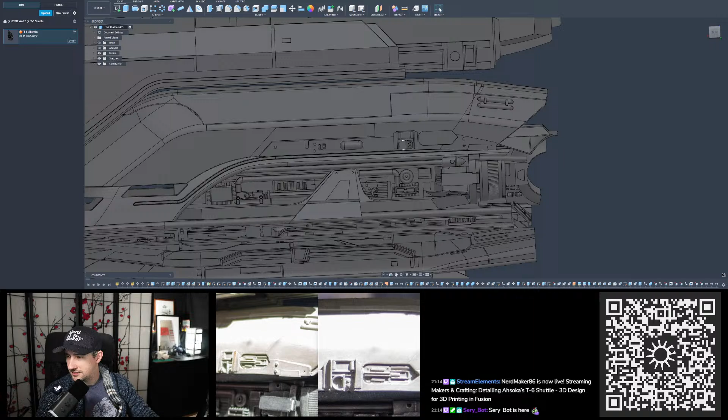Wait, yeah, let me switch to the other scene real quick. Printer is not running today, so I need this one, I guess. I need to clean up my OBS. I created a couple of duplicates, trying different things here and there. And now I need to look twice to not click the wrong one. So that looks alright. Okay.

Today I'm going to do the replays here inside this little cutout. And then we'll see how late it is, because I think it will be a rather short stream today, because I'm already a little tired. I haven't slept all that well. So let's see.

Alright, this is the cutout here, where we're going to place nice little details. And yeah, I still need to move this edge here, but not today, I guess. I have it on my to-do list so that I don't forget it. But I want to do this. Could be more fun.

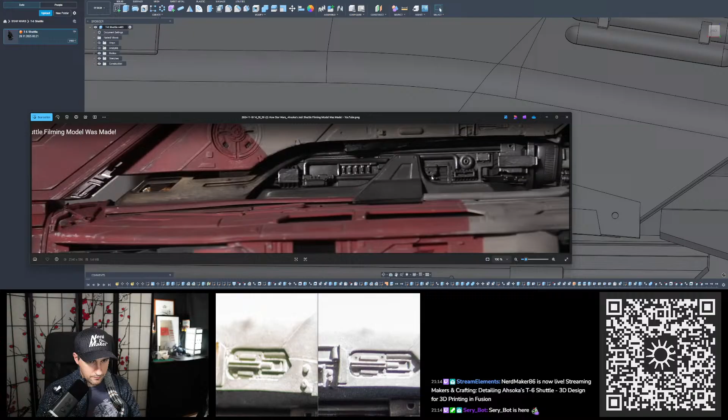Yeah, I wanted to find one other picture that I thought I had. In this one? No, it's not as sharp. No, I think I already have the two best ones open that I have. Alright, let's go with this.

So, quickly analyzing the part here. This is basically one plate with 4 holes in it, then some kind of U profile on top, and 2 little pieces of styrene, I guess. And then some round styrene pieces here and there, and what appears to be some kind of frame. Alright, let's start with this one on the left. Get our proportions in. And then we go from there.

Right, I still think those two fillets might be a little too big. I guess we'll see when we place the first part in here, how it looks. No, wait, let's isolate this part here first. Get rid of all the other things. Because when I move it around the view gets easily blocked, I click on something accidentally. I can actually close this to get more real estate on the screen.

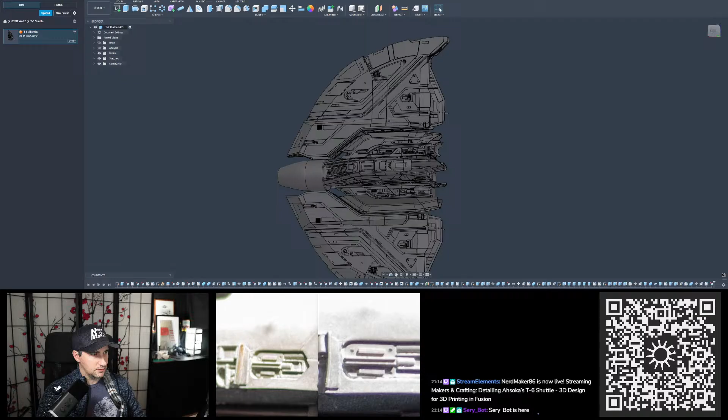So I think I need this and those details. Get those back. No, you, I don't need you. There you go. Oh, you're all set. Takes up more than half of that. Let's see the length. Yeah, it's basically we take the whole length of the cutout. It goes to the half.

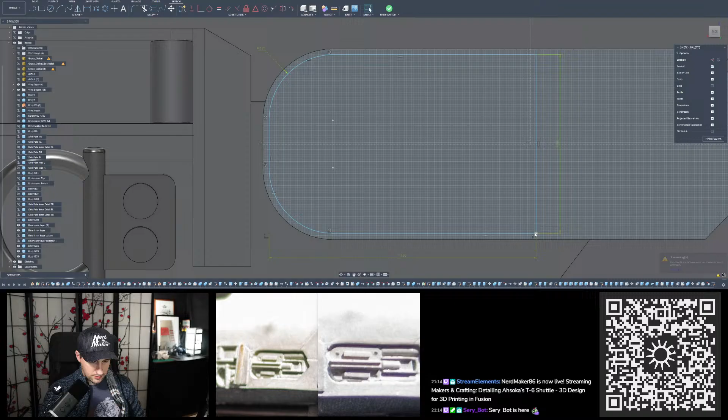So 3. I think it's a little different. So 2.5-ish. Mm-hmm. 2.75. And the other two we could do, well, 2, I think. No, this is a proper corner. It's only up here where it's a fillet. Okay, so let's do this in sketch as well. Maybe I should place those holes first. Maybe not. Wait, it's the wrong one. This one, well, looks like a 1. Okay.

Right, I wanted to make this symmetric to the middle line we draw here. So then I can just mirror the upper holes. If it is even symmetric, I should probably check. Let's see. Yeah, more or less, not exactly, but I think I go with symmetric first, and if it doesn't look right, you can always change it later. So you are a 1mm hole, I assume, because it is smaller than this. It looks kind of like this.

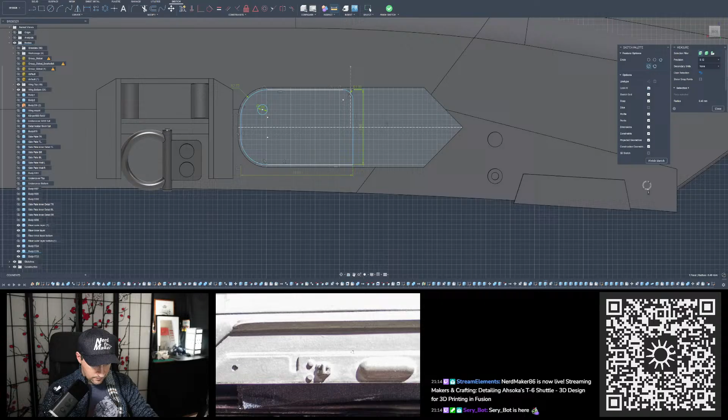What did we have back there? Let me check real quick. What is this? It won't tell me. Oh, there you go. 0.8. Diameter. Is this smaller here on the reference picture? Well, it's pretty much the same, so it's not 1, it's 0.8. If we use the same diameter that I think we should. Okay.

I think it's already placed quite good. Let me see. Gonna make the same distance, those two lines. Let's leave it here. It's not symmetric to the right. The right one is a little more up top. I think it's pretty much the middle point of this radius here. Let's try that. 0.8. Oh, change the line type again. There you go. Okay.

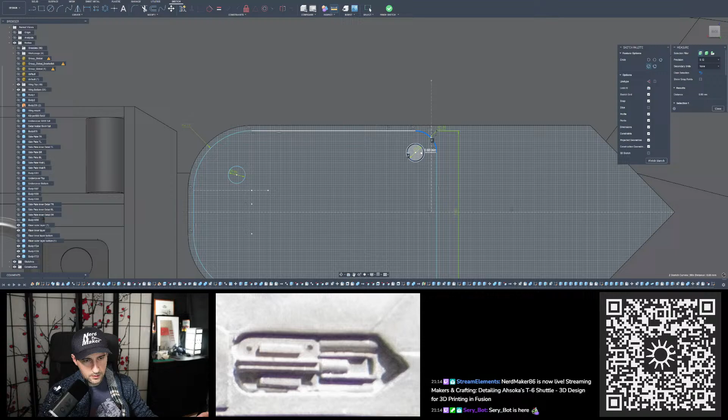Let's see. 0.6, so it needs to be a little bit further away. So it's not on a midpoint. So that means delete this constraint and move it a little more towards the middle of the plate.

If Fusion wants to move again. If the program freezes up, it's always a good chance to hydrate. But now I was too late. It's already finished, so...

Hey! No, that's not what I want. I want this circle. There you go. And I want the distance from this line to the outer radius line to be the same as the diameter of this hole, so 0.8. So I'm going to apply a construction line, and I can reference this one and put my dimension in, just like that.

And to be even more exact, make this line that we drew coincident with the midpoint of the outer radius, and now it's perfectly aligned. A lot of those things are probably overkill in terms of dimensional accuracy, because I imagine if it's not a kit part, if it's scratch build, they would just drill a little hole somewhere. I don't know if they would neatly measure where they are putting it, but well, that's the thing I do.

So now we can take those two and mirror them down here. Just like that. Now we make the sketch for the U profile in the middle here. And unfortunately, it's not really in the middle of the part. At least I think so, unless perspective is making fun of me again. No, it's definitely not in the middle. It's a little offset downwards.

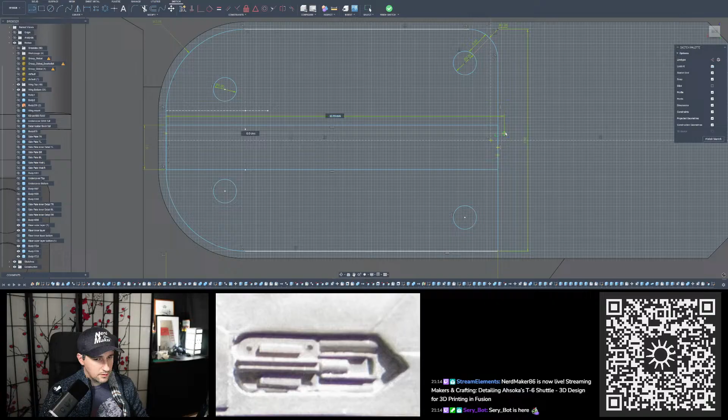Oh, come on. What are you doing? Doesn't take the constraint that I want. Okay, then let's do it like this. I just want it perpendicular to the wall, or parallel to this one here. But sometimes Fusion is just odd and wouldn't let me, so I need to draw the line longer than I needed to, and then it snaps in the constraint that I wanted, and then cut it again. I don't know why it is doing that, but can't help it. Just the way it is.

Okay, let's see. Those were probably 0.75 millimeters, and oh no, wait. Half of it is 0.75. So it's 0.25. A quarter. No. Wait a minute. Oh, calculator thingies. Yeah, okay. I want it to be a quarter of the thickness of the walls here, so 0.375.

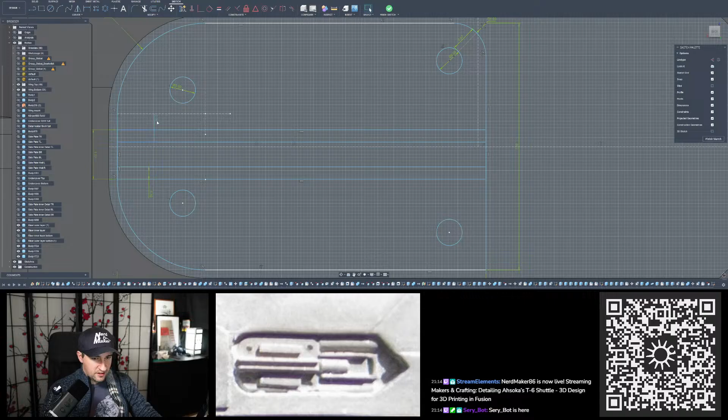Okay. There you go. 0.375. 0.375. There you go. So now those little styrene blocks. The one is fairly parallel to the horizontal lines, edges and whatnot. The lower one is a little crooked. So let's see.

The question is if they cast that part and duplicated them on the other sides, or if all of those are handmade, then probably all of those details, which are 4 in total, might be different. It's something I have to check once I'm done with the base design of all those greeblies on this thingy, once I copy them over to the other side and to the lower riser part. But I will probably do this off stream, because that is some tedious work.

Oh, I didn't set any dimensions yet. What do we have? Probably a millimeter? You as well. Length 6 looks nice. A little more towards the top here.

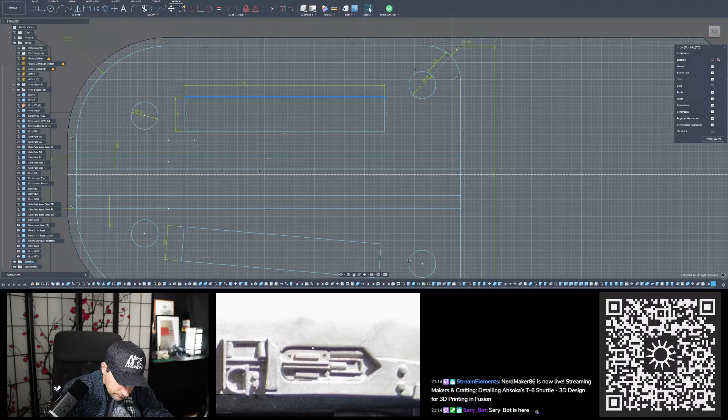Compared to the U profile, it should be a little thicker, so it could be 1.2. And then we can move this even more up here. Like that. Make this 1.2 as well. And are those the same length? Not exactly. Contrast is pretty bad here. Yeah, it's the same length.

So 6 it is. The angle that I put here is too much. So we change that a little bit. Grab this and rotate. Basically goes from this hole to that hole in that fashion. Let's draw a quick construction line.

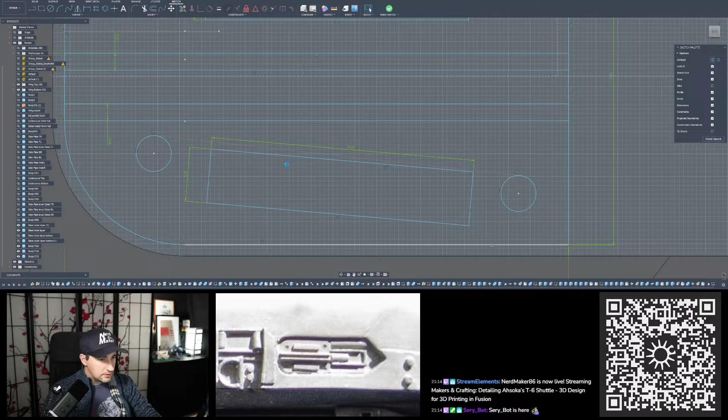Waiting again. Oh, hello. Oh, come on. Is now every click going to be multiple seconds? Yeah, performance has been better. Let me think. Well, the PC has been on since Tuesday. So not that long. It's been longer, but it certainly doesn't like it. Oh no, I had a restart for Windows update, I guess. So it's probably only since yesterday. Doesn't matter.

That is good. So let's exit the sketch and save real quick. And then I'll make the sketch for the right side.

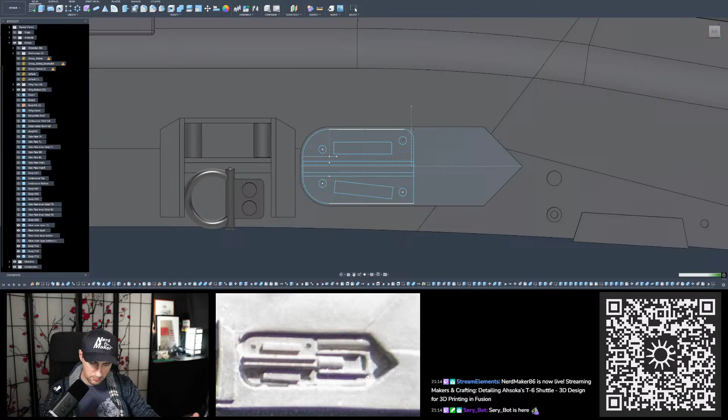I'm trying to figure out if there is still something here. There's a little bit of shadow, or if it's just glue, I don't know, stuff and not really a detail. But since those are the two best pictures I have from this area, I can't really tell. So we'll leave it like that.

What do we see then? Yeah, right. Saved. All right. Let's go back into the sketch.

This round cylinder thingy up here. It goes a little further in and is rounded then on the end. Or is it a chamfer? Maybe nothing at all. No, we'll see.

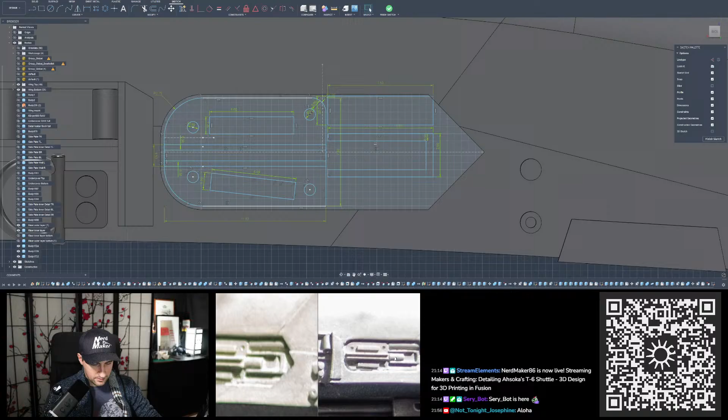Oh no, we need this cylinder part in the middle.

It's a little bit longer than half of this, so the half is here. Then we go a little longer. Yeah, 4, 4 is a good thing, and so, yeah, I need to make it 2, otherwise it would be thinner than the one on top. So that would mean the 3 is not enough, so let's make this 3.5.

Bring this up here again. Then we can make this 2.5. And then it sits nicely in the middle here. Let's align those already. And there you go.

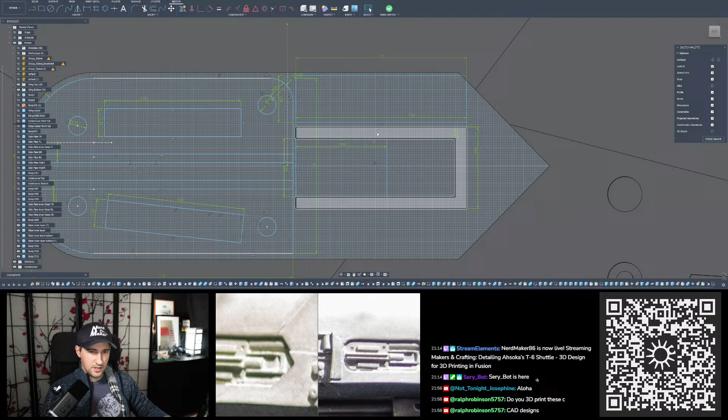Yeah, most of them. Not all, because I reached a point where I don't have space anymore to put all of those. But if it's a cool design, or if it's something that I really want in physical form, then yeah, I print it.

PLA? Well, it depends on the design and what it's for. I used to print a lot in PLA, but if it should have any mechanical structural integrity, I use PETG for now. Because I noticed I have PLA prints that are like 6.5 years old right now, and they just start to fall apart. So that's not good. And I hope that PETG is a little longer lasting.

Cura? I used Cura with my first printer for a long time, but I was never really satisfied with it. And now since the middle of the year, I have a Bambu Lab P1S and switched to Bambu Studio, which is a branch of PrusaSlicer. I must say I like this slicer way more than Cura. It looks nicer. I think there are way more features, or they're easier to use.

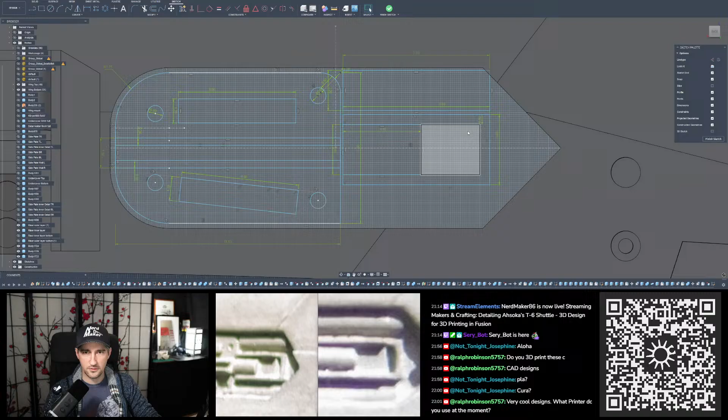Cool designs, thank you. What printer do you use at the moment? A P1S from Bambu Lab is my printer for filament. And for resin, I have an Anycubic, what is it, Photon Mono X. So that is a little older machine, but it still does the job, and I don't need the highest resolution for my kind of work, so it still holds up.

SARShasMONO. I think this is Steven, right? How are you liking the Bambu Lab printer so far?

I'm not gonna lie, it's the best filament printer I've had. Not that I've had too many, but out of the three I have, or had, this is by far the best one in terms of speed, reliability, and ease of use. It's just a completely different game.

I had an Anycubic Mega X before that. That one had a bigger build volume, but I didn't use the whole build plate that often. Before that, my first printer was a TEVO Black Widow, a complete kit I had to assemble myself with all the wiring and everything. That thing was crazy. Maybe the wrong thing to start with, but there wasn't much around back then that I could afford.

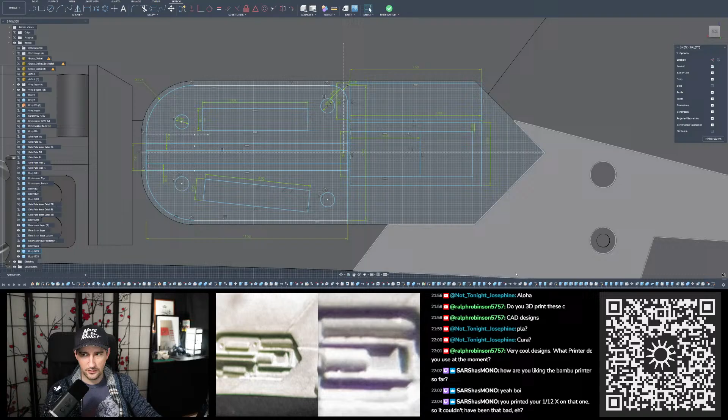Alright, I still need this little thingy here. I think I'm going to extrude everything, and then we'll make this triangle ramp kind of thing later. So let's get out of here, save first, and then we'll extrude those.

Okay, let's give that a minute.

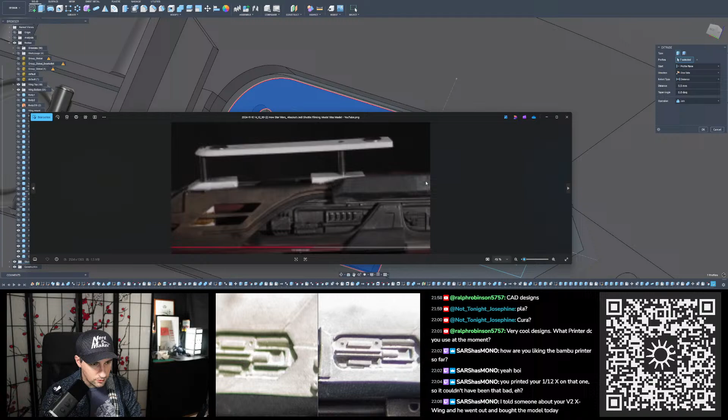So I think we'll start left to right. Where, oh, did I close it again? I had one, because I need to check the thickness. Well, yeah, that is too much, so it's probably 0.5 millimeter. But I had a picture that's more from a behind view. Oh, which one was it? This one? No.

This one? No. I wish I could come up with a sorting system for reference photos, but I haven't put much thought into it, and the thought I did put into it didn't lead to anything, so... Well, this is that one, so that won't help me. Yep. Damn it. Where did it go? I thought I had one. Oh well. I can always adjust later if I find it. Don't want to stall too much here.

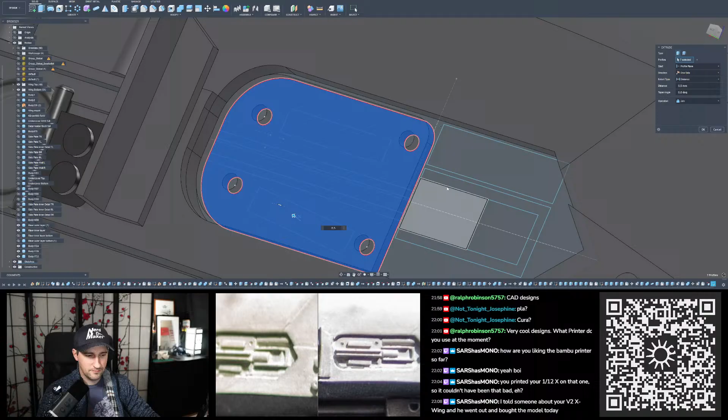Where was I? Right, extruding. Half a millimeter. Now let's make this a new part. Let's hide this real quick so nothing gets attached to it. We can join those, and then the U profile on top.

What was it, 0.3? What, 8? I'm pretty sure I made it 0.375. Is it rounding up? Ah, okay, need to set the precision to 3 digits after the decimal. No, it's correct already. So this is 0.5 plus 0.375.

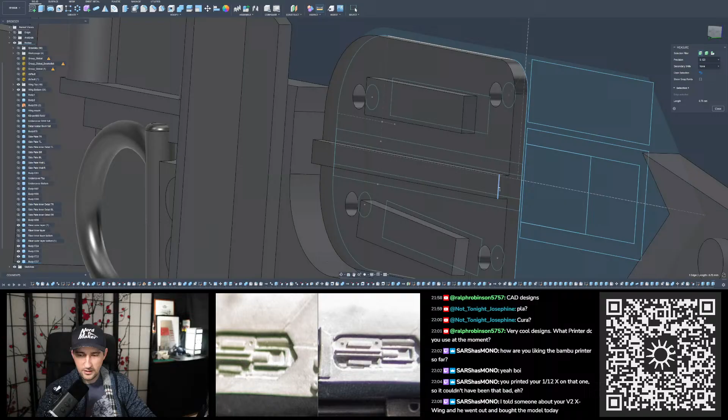And the wall height, if it's a regular U profile, should be the same as the width here. So 0.75 plus 0.375 plus the base. Oh, those odd dimensions. No, those, 1.6 in a bit. Join that.

Let's take a look. Yup, looks good. I think I'll do this first.

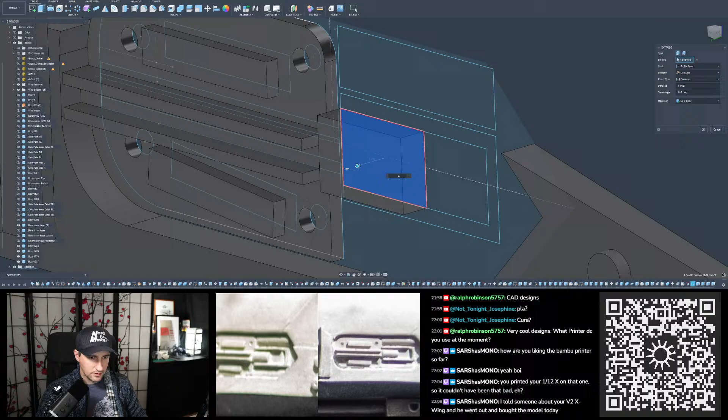Let's make it the same height as this. Maybe a little higher. What is this now? 8. Let's make this a full millimeter, because the width is 2.5. But it's not exactly half because it's flatter than a half circular thingy.

So that should do it for now. Fill it. Oop. Oh, that's too much.

Okay. And little fillets on the beginning and start of that thing. But Fusion, again, needs a minute.

So Stephen, how is the Red 6 coming along?

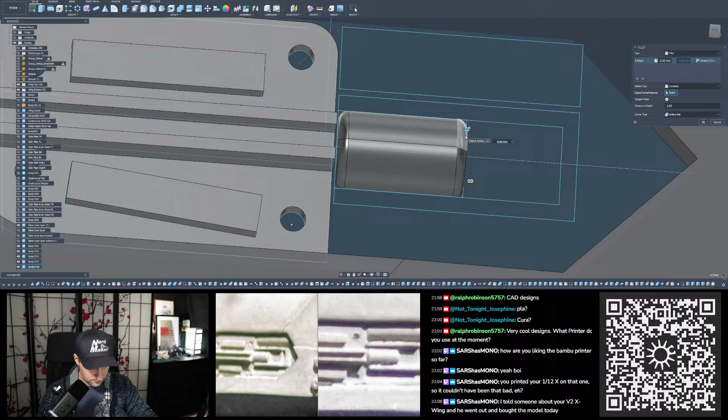So U profile. Well, it's not a U profile, but a U-shaped thingy.

I think it's more or less the same height as this thing, so there would be 1. Let's start with 1 and then we'll see.

Great, just waiting for some paint to arrive in the mail and then I'll get going on it again. What did you order? Are you using Archive X paints or something else?

That was 2 millimeters. Half of that would be 1 millimeter. Yeah, seems about right. Oh.

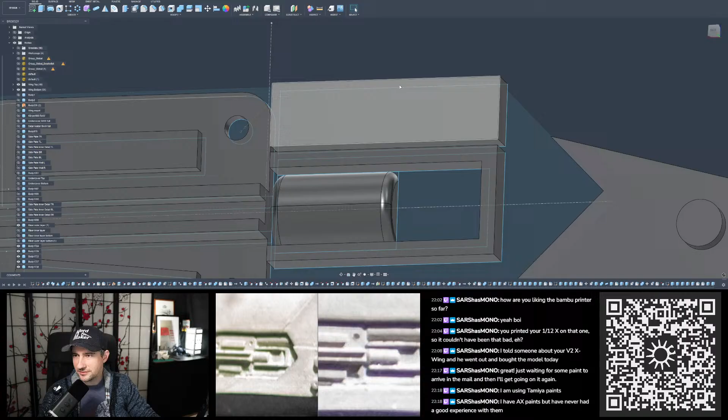I'm using Tamiya paints. Where is someone else who is not using AX? I have AX paint, but have never had a good experience with them. I read that a lot, weirdly. It's kind of like 50-50 what I read on the internet about AX paints. Some swear by it, say it's the best, holy grail, whatever. Others are like, nah, never again. I tried to order once a couple years back and they were never available, so I gave up on that and just used Vallejo.

Any advice from someone learning how to use Fusion 360? How did you get so good at it? Well, thank you for thinking that I'm so good at it. Boy, advice. Practice. A lot of practice.

Maybe a little background here. When was that? I started my engineering studies in 2010, and there we learned Pro/ENGINEER, a real proper CAD program for engineers. That's what I'm trained on, and basically I've been using it since 2010 in several different jobs.

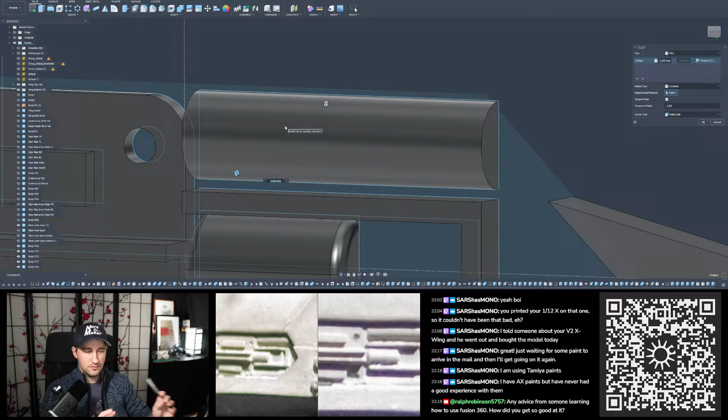The other thing is, often there is no just one way to get a specific geometry. You could use different approaches to get the same result, and this is also something you have to figure out for yourself - what is comfortable for you, or what do you like more.

Oh wait, I could use this one and place those fillets. Oh, no, never mind, let's use a new one. I think this one is a little bit bigger, so let's use 0.5 on this side. Yep.

Again, practice and doing a lot of repetition is the best way to learn. Especially at the beginning, don't just use it one day and then not for 3 months and then again for 1-2 days, because you forget a lot of those operations, how they work and how to apply them. So if you could use it regularly, every other day, just to train your mind and keep it in mind.

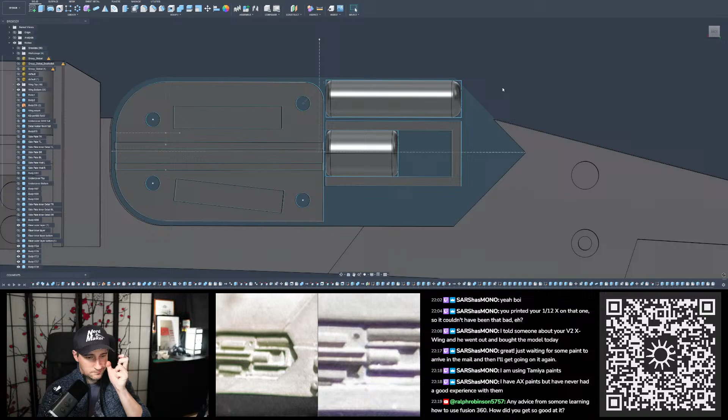Okay, I think we have all of the things extruded from the sketch. This, and that. So do I want little fillets on the inside of this U? But I think I will place this triangle part inside here first.

Yes, definitely, I am studying mechatronic engineering. Is it mechatronic? Megatronic? My first year learning SolidWorks, but at the very beginning of learning the different softwares using Fusion at home. Well, SolidWorks is a different brand, is it? It's from Dassault, and Fusion is from Autodesk if I remember correctly. But those two should work kind of similar as well, I guess. I never used SolidWorks, to be honest. But all those CAD programs are more or less built the same way, except CATIA for some reason.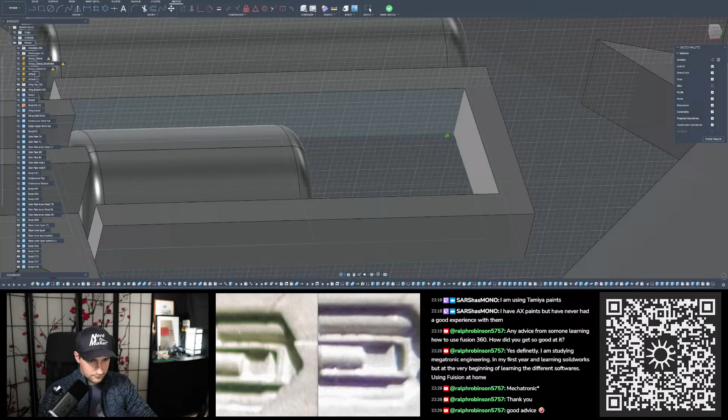Okay, let's go in here again. Where are you here? You two should be the same. There you go. Okay, let's see how that looks.

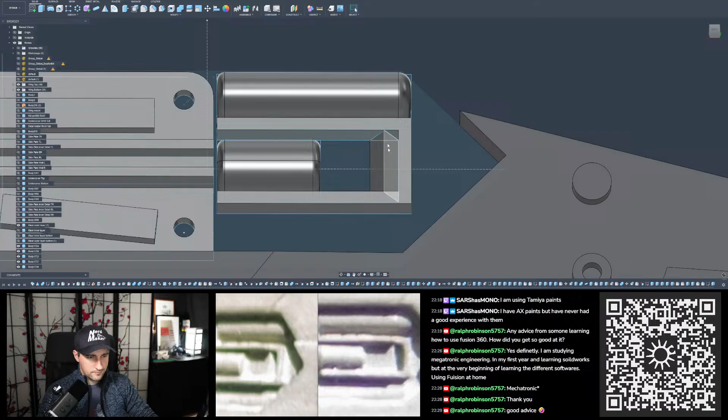I think, oh no, I want to make this fillet, so let's make this a new body so they don't interfere. That's a little too steep, the angle. Let's... oh, that was too wide. Yeah, that looks better. Okay, let's get rid of those sketches. Boop, boop, hide them. Now I can place the fillets inside here.

What might that be? 0.2, something small. Just like that, and front here it's also round. What was the wall thickness again? I forgot. Oh, that's about right.

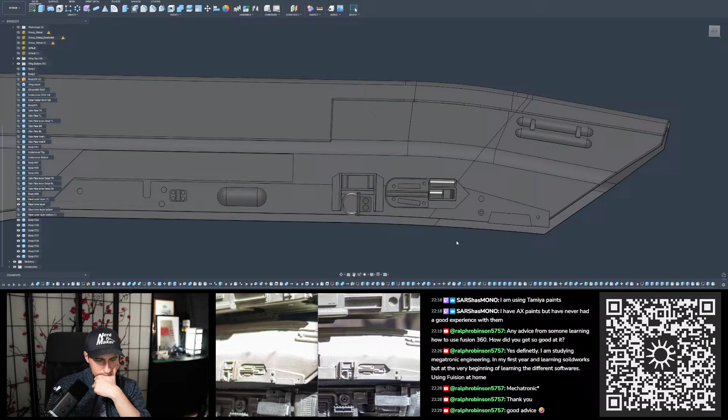Okay, I think we have everything in here. Where is my... this one. Okay. All right.

I think I will adjust the angle of this piece, because that still looks angled too much. I think I got thrown off by this shadow. Yeah.

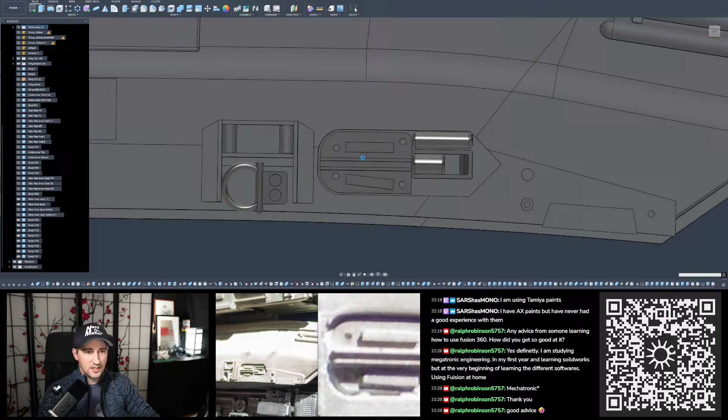That's not really advice on CAD itself, but never say you want to make something quick, it will never be quick. If someone comes to you, hey, let's make this quick in CAD, or let's change this quickly, no, that mostly will not happen.

It's the wrong one. Delete those constraints, then we can't. Oh no. You should just, oh right, probably need to delete this parallel constraint as well. Which one is it? This one. Can I now move you? Yeah, that's just what I want.

That could work. Let's give this a dimension, because I fear if I make the constraint it would just pull the line down, and not my rectangle up. Okay, and now up there. Let's see.

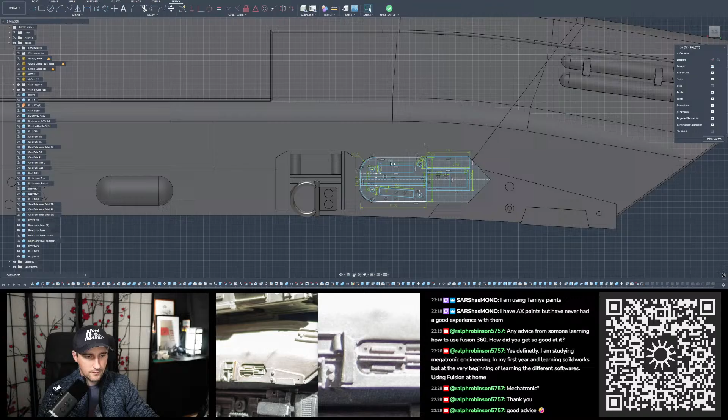That looks better, but I'm still not satisfied. And I think this hole needs to get a little lower. Well, they're probably not mirrored, are they? I can bring this a little bit up as well, I guess. And then you come down here. No, wait a minute.

Let's quickly fix this, that it doesn't move around. Let's try this again. Oh boy. You should go up here.

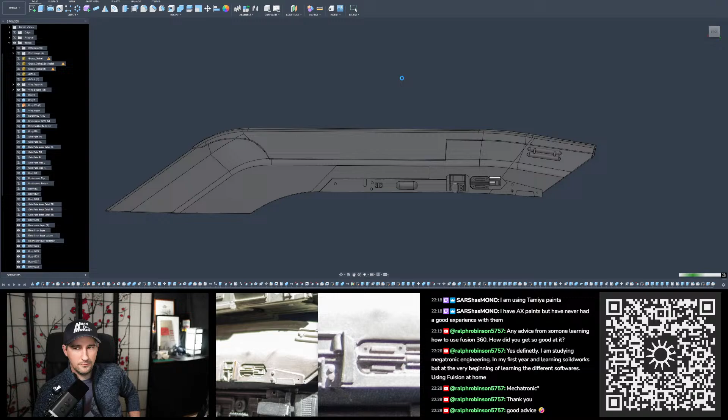Okay. That looks like it should now. Goodie. Save again. So just for your information, I now save this assembly for the 468th time. But I'm also working quite a lot on that for a long time already.

Okay, so now we got this. I think this completes this panel down here. Got this one, this thingy, pill-shaped part. This goes to this and that. Okay, well, that looks good. So then I guess was this down here as well? No, it's not there. Okay then.

I think I'm going to adjust the length of this panel now, because somehow, I have no idea, I placed the sketch wrong, because this line should line up with this line here, and it's obviously not. But here you can see it comes down here and aligns with the end of this cutout. So let's see if I can just move this towards the left, or if it screws anything up. I hope not. It is saved, so yeah, we can go for it.

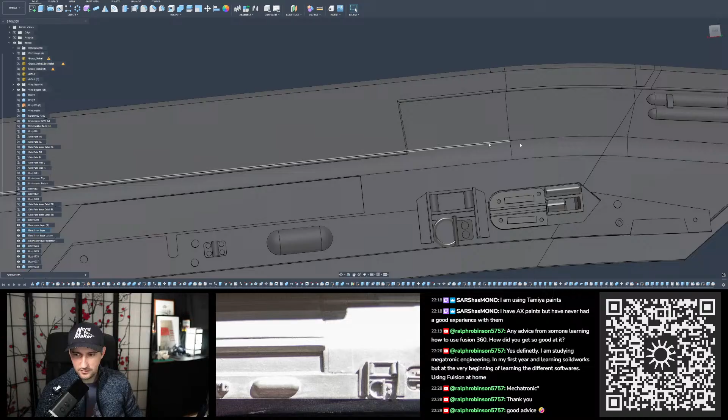Let's see. This and over here. Move, where is it? Oh. It will not let me move it. Would have been too easy. Bummer. Nope. No. Huh? What? You should not select. Are you stupid? I wanted this as a reference. Wait. Oh no, what? I selected those. Why did it deselect them? I have no idea.

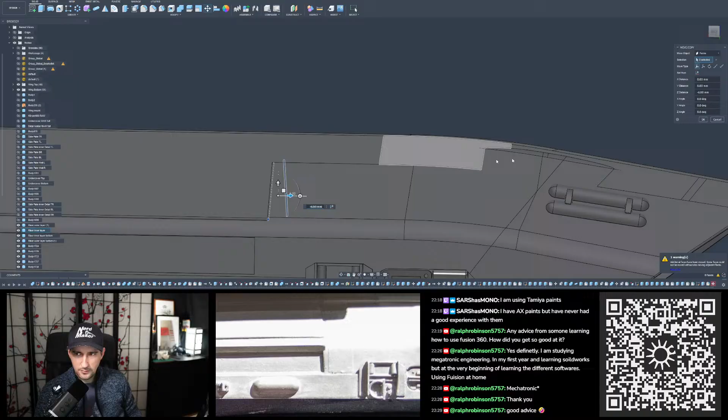But now it's making weird stuff over here. And that is not so good. Let's see if you can bring it over here. No. It's too far. Oh, there. It was there for a second. Yeah. Okay. Still some weirdness here. Let's confirm this. Maybe it will figure it out. Let's see what happens. Okay, the movement worked, but now this looks like crap.

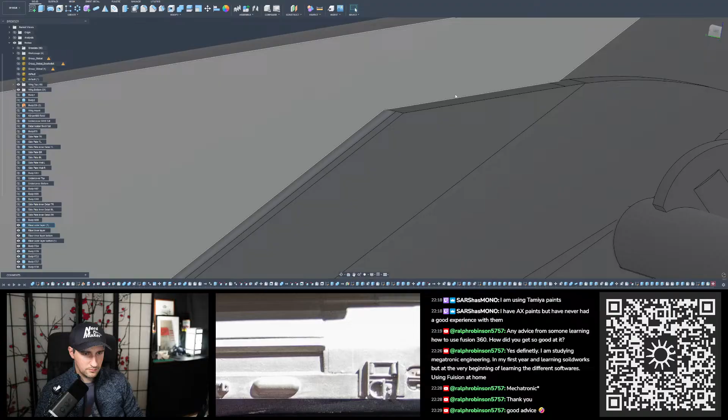Okay, let's undo that. Then we're just simply going to cut it out. My fillets are gone. Wait. There's still an aborted feature. Let's remove this as well. There you go. I mean, I could try if I delete those fillets, if it will move properly, then let's just try this real quick. So then it's only 2 surfaces that it has to move around. Wait, no, I should hold control to select multiple. Oh, there you go.

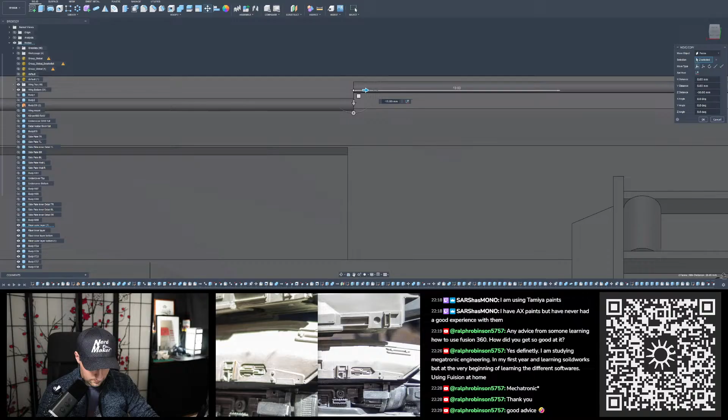Where's the other picture? Was it this one? All along? I think so. Okay, let's see. No weirdness back here for now. Let's confirm that if it stays that way. That looks good. Okay, then I can replace the fillets that I deleted. What was it? 0.3.

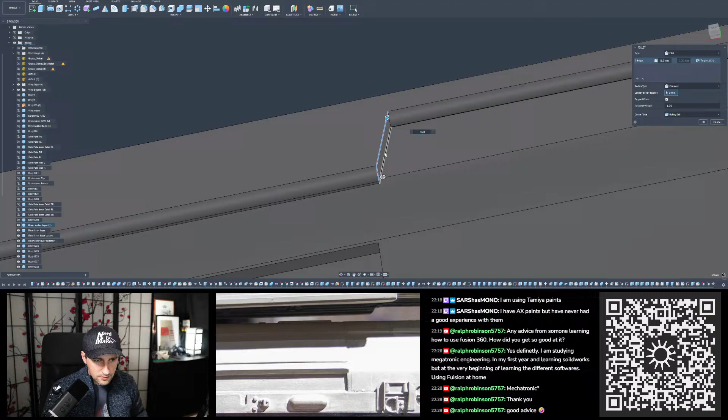How did you select 120 faces? What the hell? I want just this edge and this one over here. There you go. Boop. Perfect. And that was quicker than I thought. Well, every once in a while. Okay, so I can cross that off my list. This one. Okay. Yeah, save. So now what?

We have this down here, we have this up here. We change this, and I think I might do this geometry here above this cutout. There is some kind of an edge. Maybe it's a T profile. I can't really figure it out on the pictures because they're just not sharp enough or in the right angle. Because when you look on the left one here, you just basically don't see it. If you look on this one here, you can see a hint here and in front here. And on this one up top here, you can also see it a little bit. This could be a T that is sanded down at the start and at the ending. This is probably what I'm going to do.

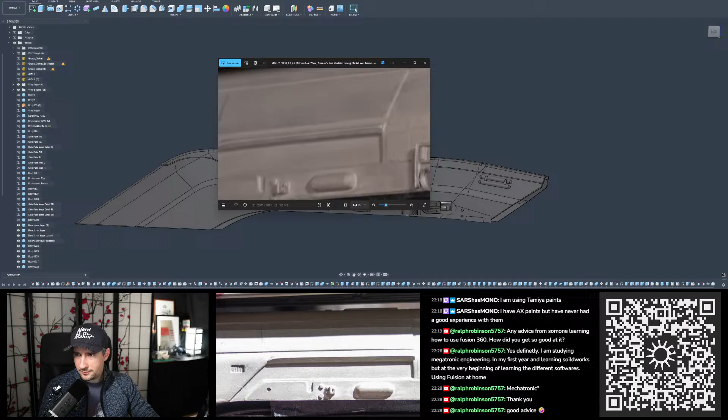I could go through all the reference again real quick, see if there's something better. But I don't think so. Let's see. Shadow looks too smooth to be a T profile, I guess. I don't know what else it could be. I don't think that it is a kit part of some kind. Maybe it's just a half-round styrene piece like those two here.

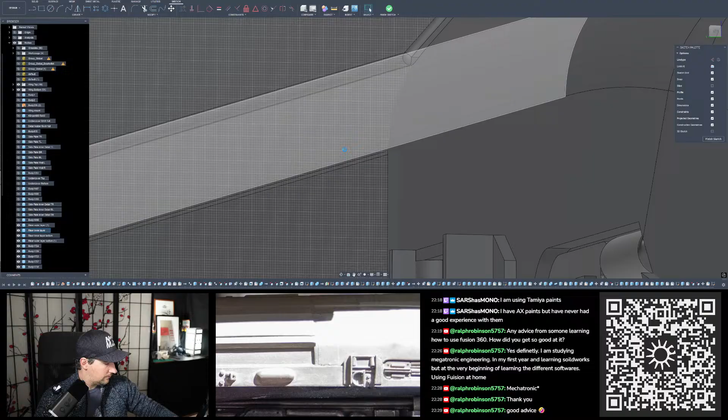Okay. Maybe this point here as well. Oh, come on. If you ever wonder why it takes me so long to bring out a new model, this is it. Well, at least part of it.

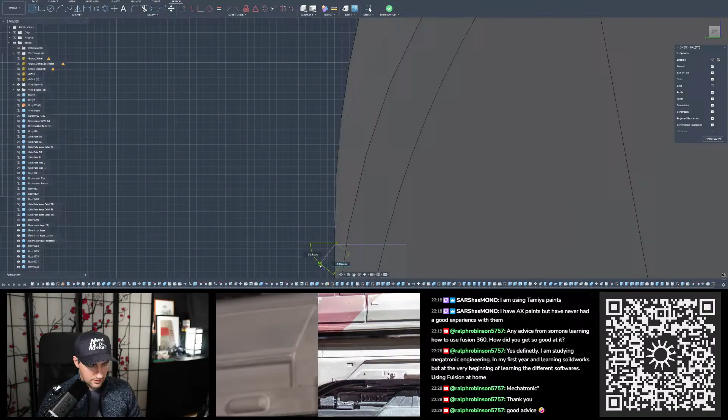Okay, now we need to start lower down here, almost on the edge. Something like this. And then just a little triangle shape. Oops. How far do we need to go up?

Okay, a little more than half the distance between the upper edge of the cutout and this panel here. Let me, oopsie, make a quick guideline. Okay, half of this would be here. So this needs to go a little more up here. Okay, what is this? 1.9, so yeah, it must be some kind of 2mm profile.

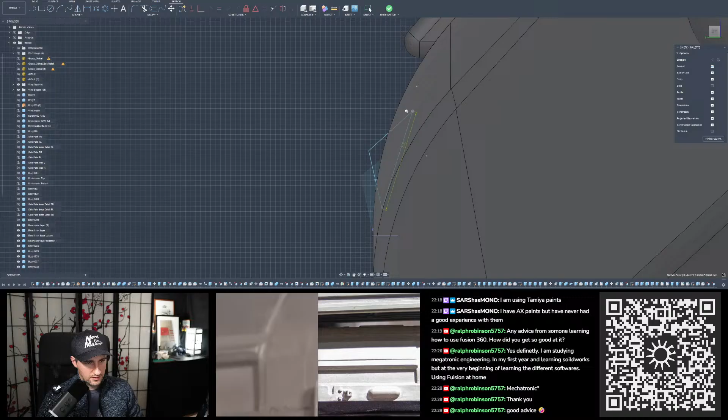With a height, if this is a triangle profile, I don't know. I've not often seen triangle profiles. Maybe let's go with the angle. But first we're going to make these two sides equal to each other. Well, no, what the hell is that? Why is it dragging the construction line now with it? Oh, so on the same point. Oh, that's not what I wanted.

Eh? Is it? Oh. Did not see that. What's the wrong one? Oh, come on, show me the constraints. Hello? Why not? Oh boy. This one? No. Okay, then, well, screw that and this, delete that. I know it should be 2mm. Oh boy. Why does it move so weird? Yeah. Okay.

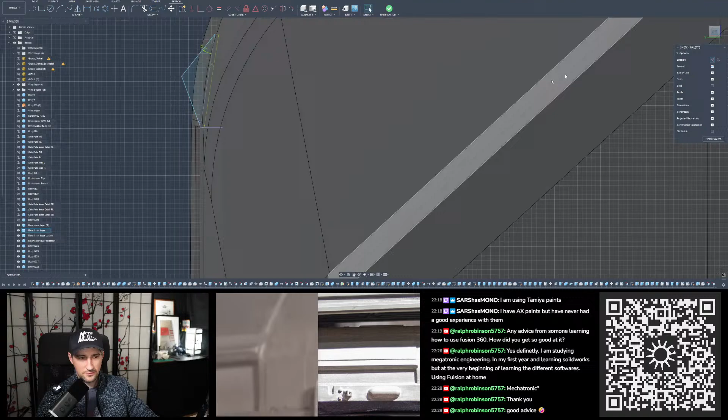Yeah, by the way, Ralph, I don't know if you're still here or not, but regarding sketching, you should not copy too much of what I do here for your engineering studying, because this is way different than real engineering. This is for 3D printing, and sometimes I just need to arrange things without any sorts of constraints to let it be free so that I can change it again later without a great hassle. So if I would build an engineering part, I would do things differently for sure. Just a little heads up there.

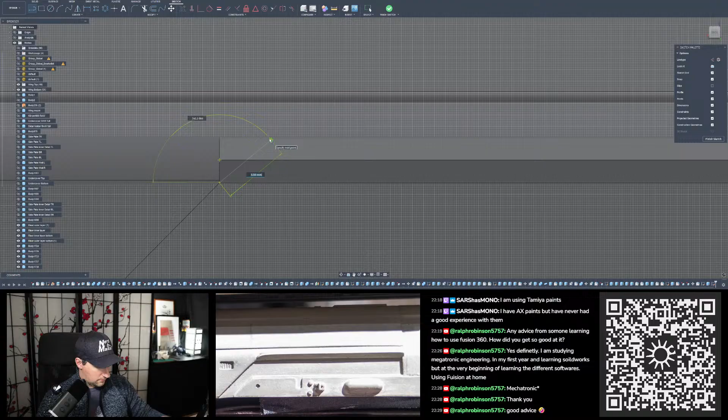Okay, let's extrude this all the way to here. Make this a new part. And then we need to cut off this corner here. But I think I will. Will I? I don't know. Now let's cut this first. Can make a sketch on the bottom of this. More or less the same angle as this here. So what was this, 45? It should have been. It's not quite 45. Why not? Weird. Never mind. We do 45 here.

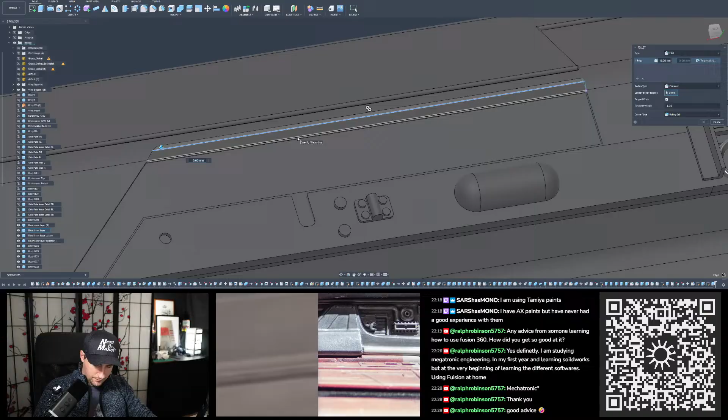Okay. Cut this and only this. There you go. And now I'm going to make this round like here, and I should also make this radius. Should I do this first or after this? I'm not sure.

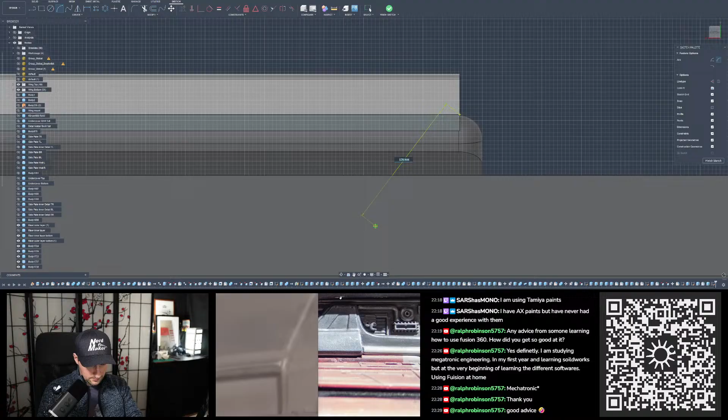See if we can throw this on. No, that looks weird. No, I need to cut this out. Okay, let's then, this is probably the wrong angle. Okay, let's hide this real quick. I can extrude this surface just a little bit. And then I have a perfect surface here to place my sketch on. And then I can make this round. This round cuts here. Let's see. It's just a little bit. It's not very much. Yeah, probably just the 2 millimeters.

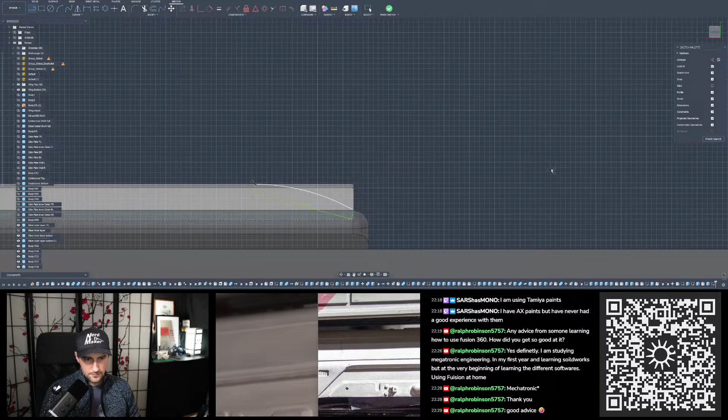No, I should have referenced it. So let's do that. No, go 2 millimeters here. Align this nicely. There you go. Same on the other side. 2, I guess, as well. Let's see. No, that's more. Probably twice as much. Oopsie. There you go. Close those loops. Okay. Now we can cut this and this. There you go.

Yeah, this needs to be bigger. The one here. Oh, let's bring back this piece for reference. Yeah, this here in the real looks alright. This here needs to be bigger. I mean, the cutout, if you look at the shadow here, the radius in the shadow, it goes like here, for example, and mine at the moment ends here. So this is more than twice as long. Well, that's easy to adjust, so let's... Twice would be 8, it's more than twice, so let's make this 10. Check that out.

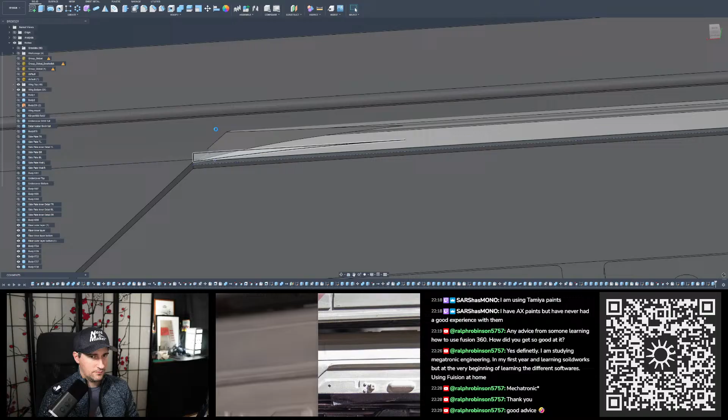Somewhere here. And then this is there. Oh. Yep. That looks good. Okay. Oops. What now? I just clicked the sketch, dude. Yeah. Gone, it's gone. So now we can place some fillets on those edges to make it nice and round. And those two. There you go.

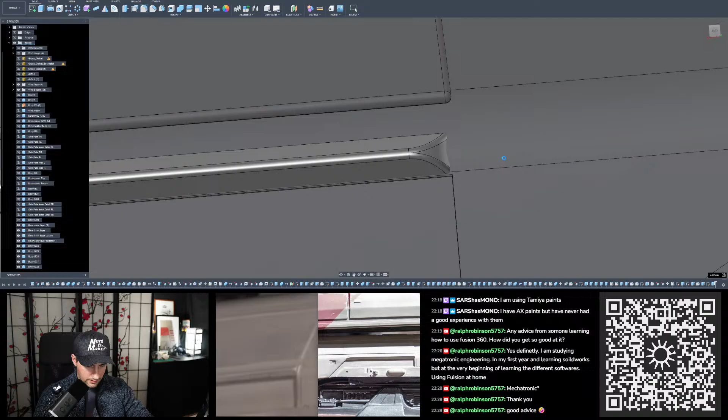Okay, now I'm missing a little bit of material here, but that could be easily fixed. I think I just bring it out a little bit because I extruded a little bit of material on there, so we can do that once Fusion is ready again, and then I think we need to place some more fillets. Depending on how that looks down there, let's bring it up just a little bit. 0.1 might already be enough. Now let's make it a 0.2. Yeah. And then we can make a fillet here, and then we should have this tiny little fillet area in this reference picture here.

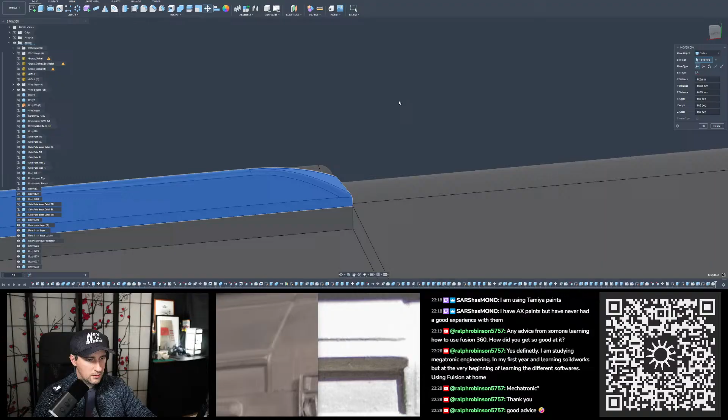Give it some fillets on the edges, on the outside as well. And here in the front the same. Let's see. Do they? No, they don't. They don't go all the way around here, so, but now that I brought it up, I maybe should start the curve lower and not here. I think so. Here in the rear, it's okay. Yeah. Oh no, shit.

Once again, 0.2. Confirm it, not abort it. There you go. But let's go back into sketch and bring this down a little more. So the question again, which constraint is it? I think this one? No. This one? No.

This is something that I definitely have not figured out so far, which references are the correct ones. Because when you go into a sketch here and you have some lines here, here, and this one here, and then the reference line that goes up here and down there, and then you have a point here and you fix it to all those different lines, and then you can see, can you see it? I don't know. Left to my mouse here, those three signs, those are the constraints that are applied to that point. And if you hover over them, you see different lines lighting up.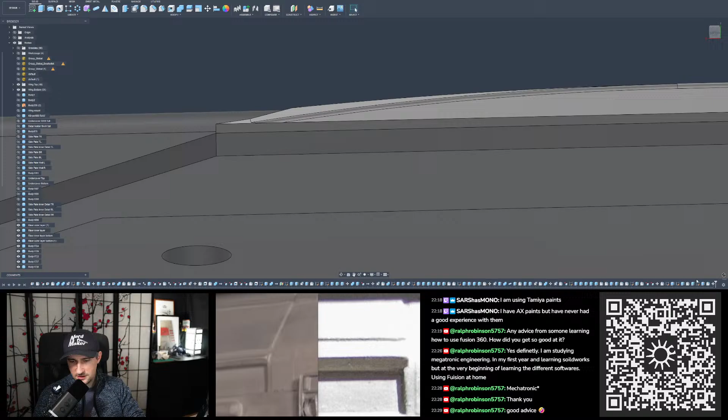Oh boy. All right. Huh? What is that? Something's not right. Oh, I did not select this. Yeah, this is also something to keep in mind in Fusion with the separate sketch profiles. This is something I needed to get used to switching from Creo to Fusion. Because in Creo you always have only one sketch profile, period. I think they introduced an option that you could do something like this, but at the time I was using it, it was not a thing. So we basically made a new profile here, and then we of course need to select this as well in our extrusion, so that it will get extruded as well.

Good thing is you mostly see it right away when you missed something. But I also had the case that I changed something in a sketch and didn't notice that it created a new sketch profile section because some lines were overlapping differently than before, and then it extruded differently than before, and I did not check that. And then you print things and you see, oh, there's something missing. Bam. Then you go to your design and try to find the error.

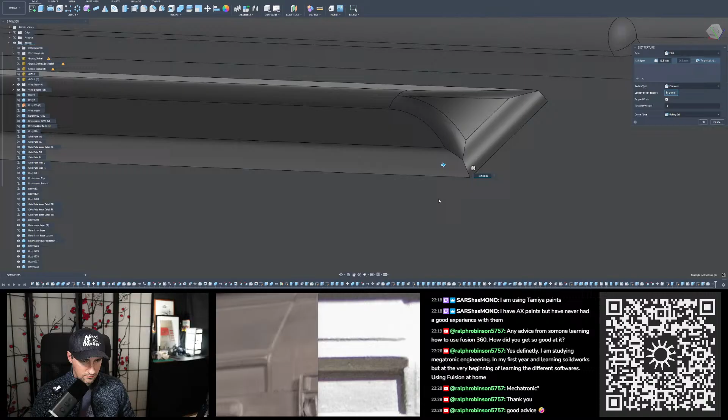Okay, so that looks better. Now fillets again. Did I? No, I did not. I think we can just use that one. Let's hide this. Nope. The wrong part. This one. Okay. There you go. I think I'll just take all of those then. What's the matter now? Okay. Oops. Just take all of them. You as well, and you. And it still does not want to. Why this one? Of all lines, this is the one that's making problems. Why?

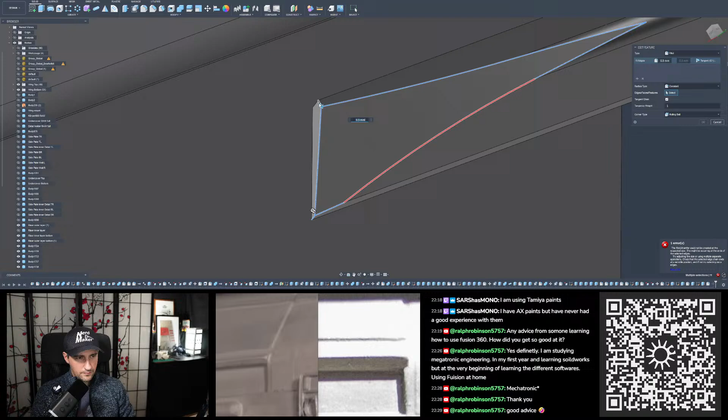Placing fillets is definitely not my favorite thing to do. Okay, you know what? Cancel that. Let's do one section at a time. We got this, then we do this, this, this, and that. That was working, but this not, right? Yeah. Okay, then let's leave those. Just do those back here. Let's see if we can use those here. No. Oh. Okay. Then let's just take a new feature. Let's see. Yeah, that's definitely too big here.

0.2, 0.2, 0.2. Oh. This and that. Oh, this one here. No. That one's alright, but not the other one. But I want this to be 0.5, so let's leave this for now here. Got that, so make another feature, and then maybe now we can do that. No? Why not? Okay, that's why. 4, 3, 2, 1.

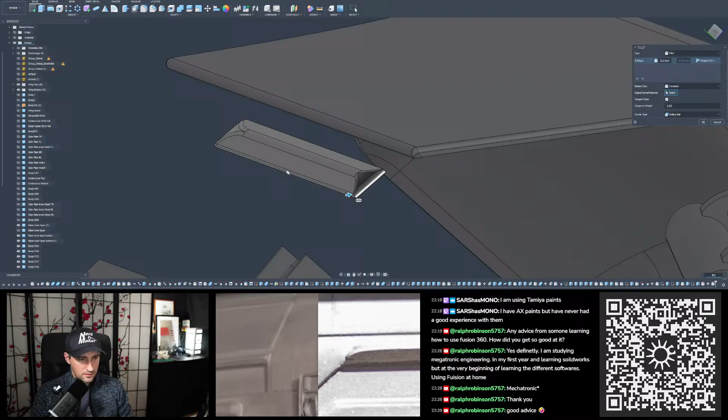What should I do with a 0.1 millimeter fillet? Might as well just leave it entirely. No, that looks stupid. Let's see if we can make the upper one 0.5. No, also not. It doesn't even give me a reason why not. It's just not doing that. Okay, maybe I can. No. This also looks weird. Different plan.

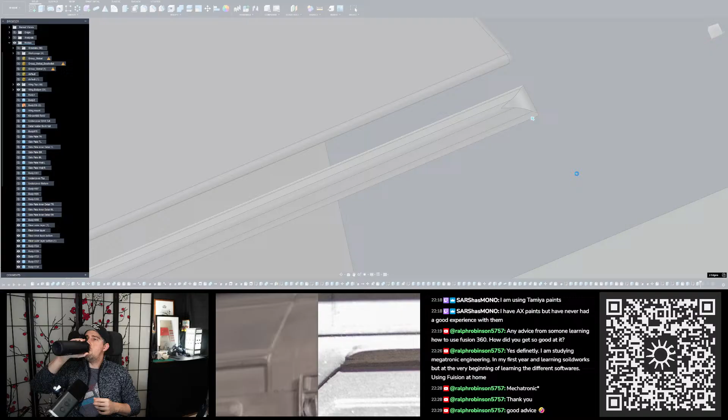No, need to roll back a little further. So now we start with those. There you go. This one and this one. Sometimes the different order that you place the fillets in will make the difference, if it will work or not. So let's place those first. Hydrate. And then we place the other ones.

Okay, now it's getting a little warm. It was cold all day long, so I put on a thick sweater jacket.

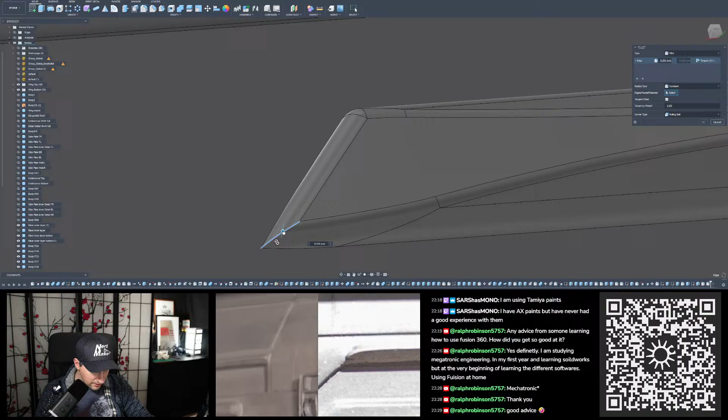Let's take those as well. No. 0.3 then. So fingers crossed. This one's. Yeah, no. Fuck. Okay, let's. Gosh, that looks weird. Okay, let's place those for now, and then hopefully we can place another one on here. Make this nice. Yeah, 0.2 I had before. I think 0.3 looks. Oh, that's too much.

So the middle, 0.25. Oh, let's bring back my part here. Where is it? This one. Alright, we didn't move it up yet. Okay. Confirm that. Roll the model forward again.

So that is a leftover feature. We now have selected all the edges, so there's no edge left for this one. We can delete that. Okay. Now we can check that. Yup. Yup.

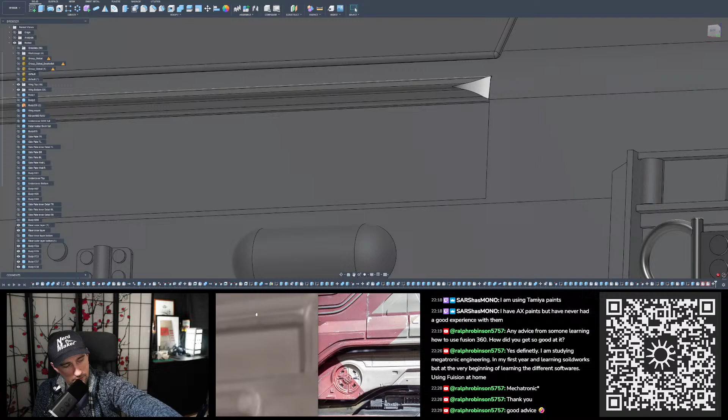Was this sketch here? So let's make this 3. I hope it will not screw up the fillets, but I have a feeling that it will. Let's see. Okay. Is it a good or a bad sign that it calculates that long? We shall see. Yeah, of course. Of course. Yeah, I think it's too long anyways.

0.2 is too low. Nah. Okay, let's undo that. So let's leave it as is and be done with it. Okay. Okay, good. See if there is a quick thing that I can do here.

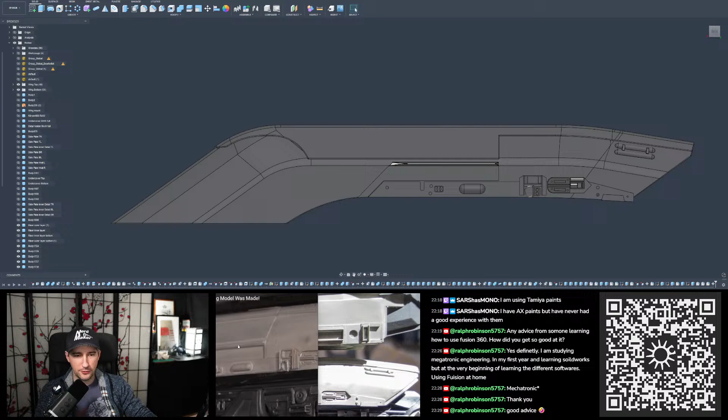The thing is, making the actual geometry is mostly not that time consuming, but checking all the reference materials and checking it against it and fiddling around with the proportions and all that, this is what takes a lot of time.

Can we? No, that's definitely take too long. I could do those two chips here, but as long as I don't have this round door, it's probably not a good idea to place those. Because I'm pretty sure I will have to move them around to get the proportions correct if then I place the door. So I'll leave that towards the end of this part.

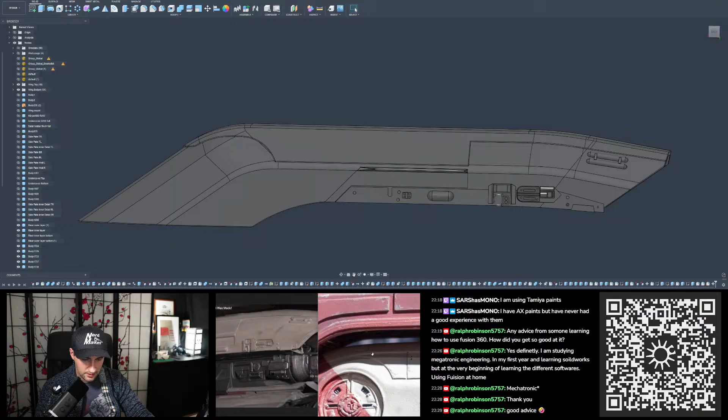So, and then maybe I will do the panel lines on top of this thing here. They should go fairly easy because the geometry is not that complicated and twisted. Well, like on the X-Wing fuselage, placing the panel lines on the X-Wing fuselage is horror. It's ugh. It's not a fun thing to do. Because more often than not, Fusion tells you, nope, not possible for whatever reason. And you have to tweak something a little bit here and there. And then all of a sudden, oh, there you go.

So, I'm not sure, maybe I will do the panel lines off stream as well. To not end up in frustration on stream. We'll see. Maybe I give it a go, and then if it does not work, I will stop it and do something else.